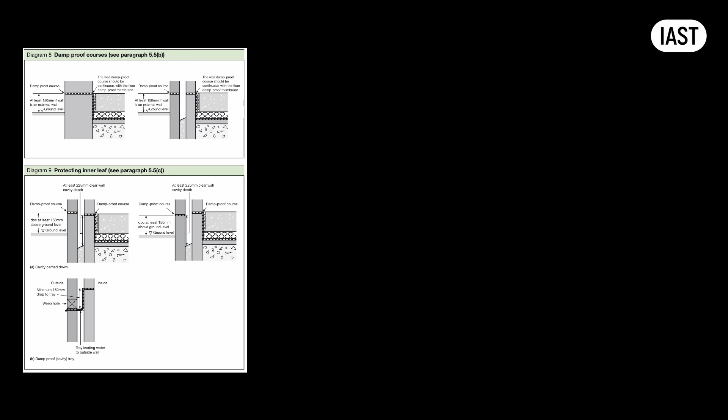That brings us to today's mission: how do we keep facades in that second category, the will leak, rather than the currently leaking, for as long as humanly possible? Our building regulations, part C, site preparation and resistance to contaminants and moisture, has some pretty clear expectations. It says walls shouldn't leak, shouldn't promote condensation, and definitely shouldn't turn into mold farms. A fairly reasonable request. The regulations even give us some practical guidance on how to design external walls to keep water on the outside, where it belongs.

Let's dive into these considerations using real examples from our Facade Intelligence platform case studies, because nothing beats learning from actual buildings. Now here is where things get interesting.

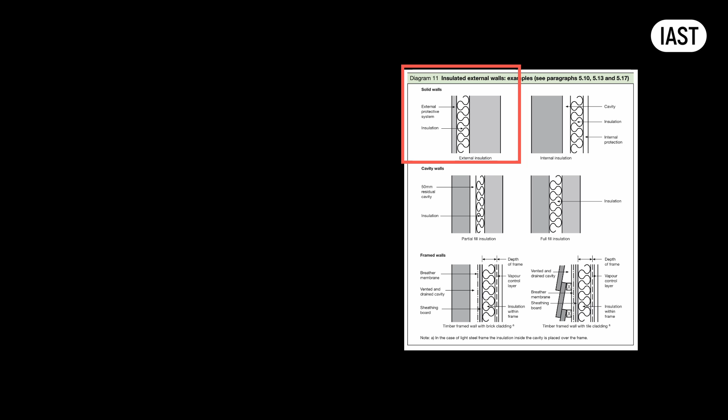Building regulations appear to give designers a free pass to use external insulated render systems without cavities. No mandate for a water-resistive barrier membrane either. So technically, you can slap insulation directly onto masonry or concrete wall, throw some render over the top, and call it a day. No cavity, no render membrane, nothing. This is what Professor Straube would call a perfect barrier wall. Basically, you're betting the farm on that thin layer of external render being absolutely watertight forever.

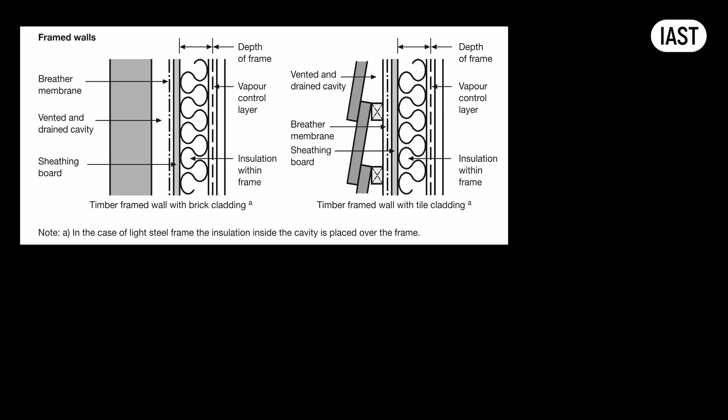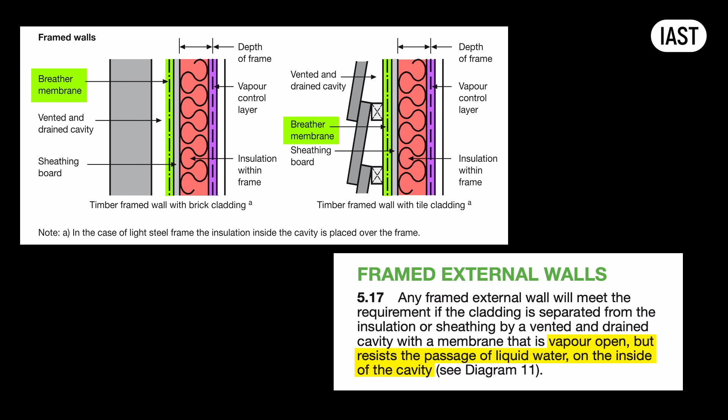Now, the regulations do mention water-resistive barriers, but only when talking about stud walls. Here they call it a breather membrane, saying it has to be vapor open but should resist the passage of liquid water, and it has to be installed on the inside of the cavity. The diagram even shows a vapor control layer on the inside of the stud wall, though interestingly they don't actually specify that it needs to be vapor closed. These two diagrams do not show the insulation within the cavity between the breather membrane and the cladding, but there's a little asterisk at the bottom that's easy to miss.

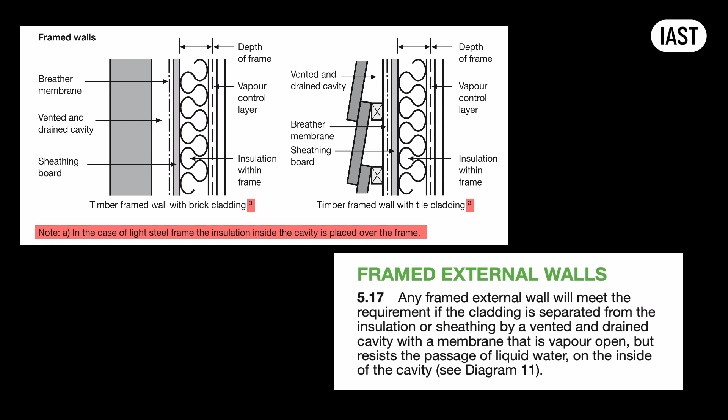For light steel frame construction, they require external insulation to be placed over the frame within the cavity. That tiny asterisk is how we end up with the most popular facade system in the UK: the rainscreen cladding wall. You've got your thin gauge galvanized steel frame, we call it LSFS or just SFS if you want to sound cool, wrapped in sheathing board that acts as your air barrier, then covered with weather-resistant breather membrane, topped with external insulation, and finally separated from your cladding by a drained and vented cavity.

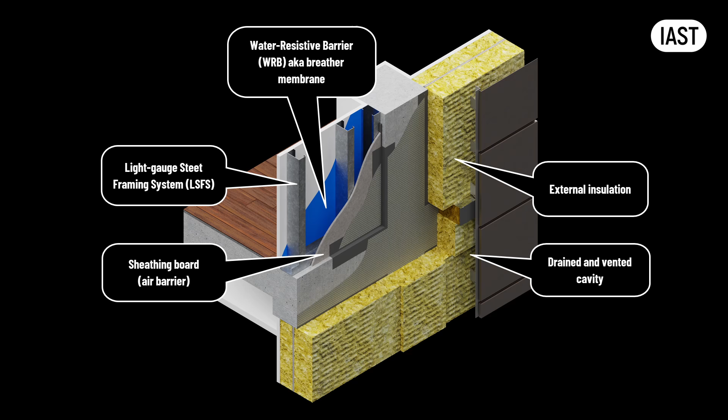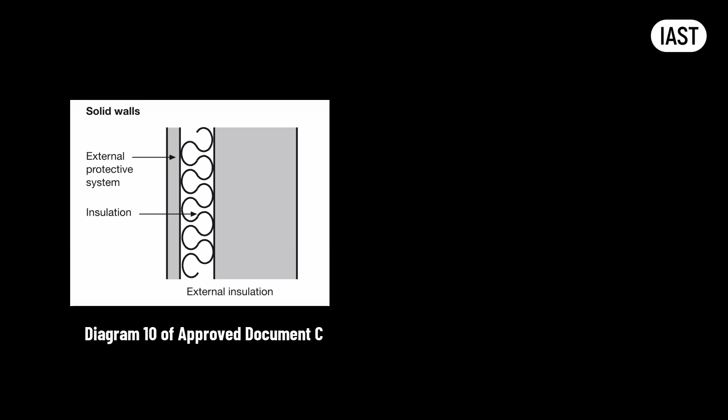Now you might think, hang on, the building regs seem to suggest I could just stick some insulated render straight onto the wall and call it done. No cavity needed. And you would be technically correct, but here's where reality clashes into regulations. The warranty providers, the people who actually pick up the bill when the building starts leaking, take a very different view. NHBC and their colleagues from LABC have seen this movie before and they didn't like how it ended.

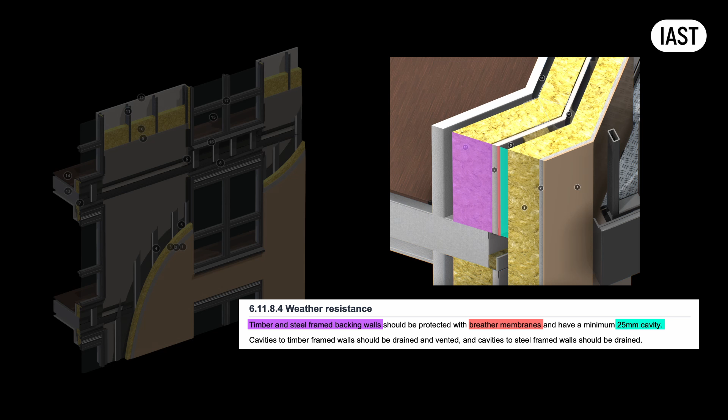So they have stepped in with some clarification. Remember Professor Straube's second D, drainage? Well, NHBC has made it mandatory. They now require external insulated render systems to have a minimum 25mm drain cavity between the insulation and the sheathing board with breather membrane, if the stud wall is used as a backing structure.

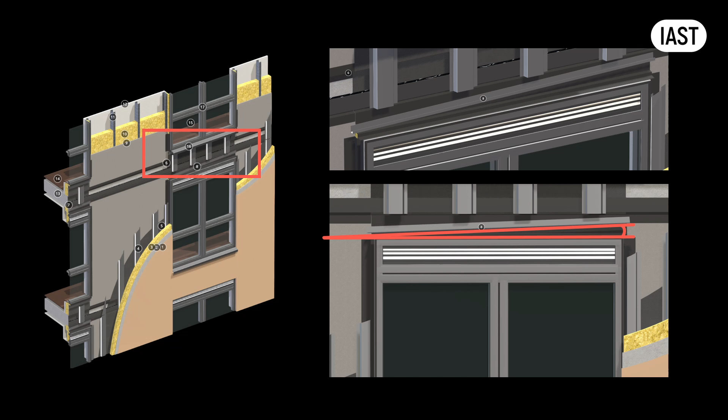But here's where things get tricky. This clever cavity solution creates its own problem. What happens when you've got a cavity sitting right above a window? It's like having a water collection system positioned exactly where you don't want water to go. As a solution, we go back to Professor Straube's first D, deflection. But this time we are doing deflection inside the wall where no one can see it. This is done by a channel above the opening, installed at an angle to the head reveal, deflecting the water away from the window, directing it down to drainage holes at the bottom of the cavity at ground level, doing exactly what a traditional drip edge would do, but hidden within the facade assembly.

So you can see now that the deflection strategy is used not only on the surface of the facade, but within the build-up, not visible from the outside at all. Another example of such invisible deflection strategy could be seen in masonry veneer walls.

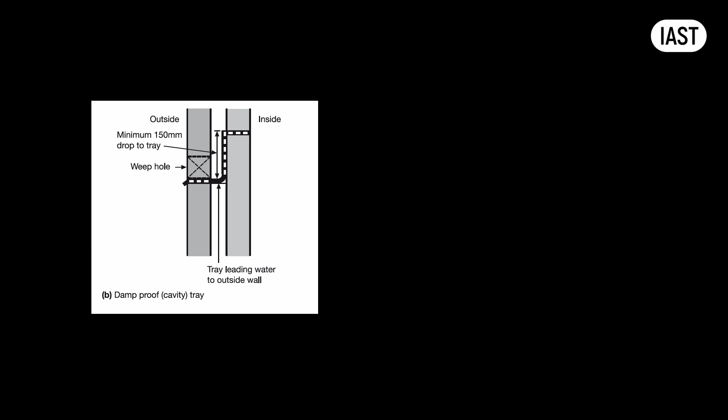Approved Document C is quite specific here. They want cavity trays with a minimum 150mm drop from the inner leaf to the outer leaf, all leading to those crucial weep holes in brick cladding. It's like building a series of invisible gutters inside.

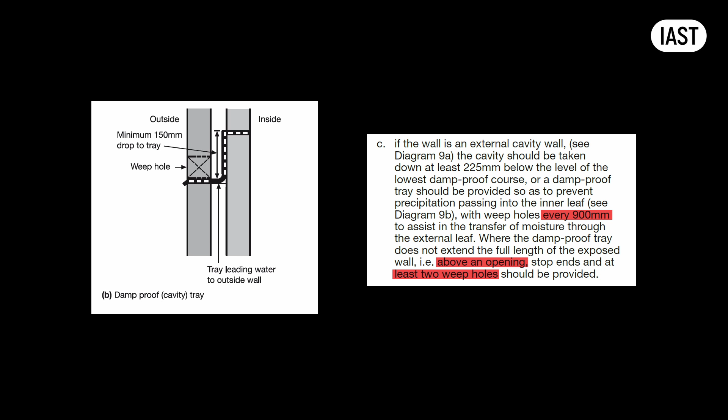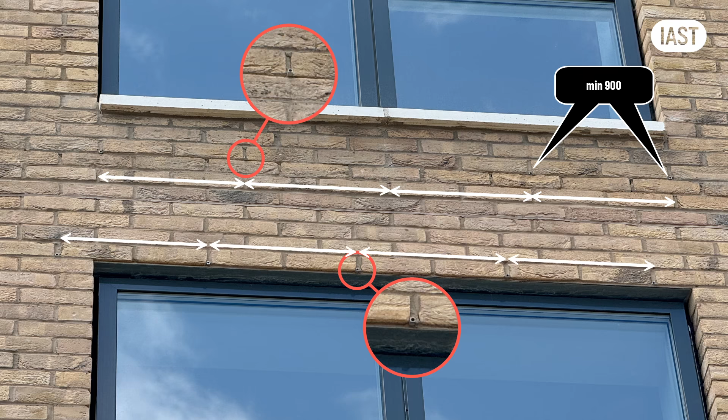The spacing requirements are quite specific. Weep holes every 900mm maximum, with minimum 2 weep holes above each window where the cavity tray doesn't continue past the lintel. Warranty providers absolutely scrutinize these details during inspections. They are checking for 1 weep hole every 3rd brick at the slab level and ensuring at least 2 per window opening.

There is a reason for their vigilance, because when weep holes aren't properly spaced or cavity trays lack sufficient fall from inner to out, problems develop quickly. The real trouble starts when mortar debris fills the gap between the cavity tray and the brick, essentially creating a dam where you need drainage. What happens next is predictable. Water ponds behind the brickwork and the brick starts its inevitable decline, turning gray and developing that horrible moss growth.

Now, this is actually an optimistic scenario. At least the water is still making its way on the outside. Once the water finds its way on the building's interior, you are facing complete facade removal and reconstruction.

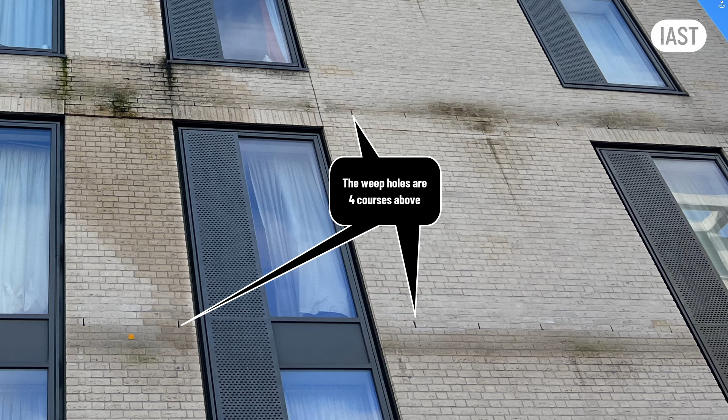Now, to be fair to this particular building, the weep holes were installed, just not quite where they should be. They are positioned 4 courses above the cavity trays, and in some locations they are missing entirely. The result is remarkably telling. The clear line of moss and mold growth creates a perfect visual map showing exactly where the cavity trays are located and where weep holes are absent.

You can literally read the facade drainage strategy just by looking at the staining patterns. The reason for the stains is that brick is a porous material and moisture can travel through it via capillary action, essentially the same force that draws water up through a sponge or towel. Water doesn't just travel horizontally through the brick, it moves vertically as well.

This creates an inevitable problem. Rainwater will always reach the first 150 millimeters of every wall through splashback from the ground. To prevent this moisture from climbing upward through the facade, Approved Document C mandates a damp-proof course, or DPC, usually in the form of a membrane positioned at least 150 millimeters above ground level. It is a simple but critical detail, one that recognizes the fundamental behavior of moisture in porous materials.

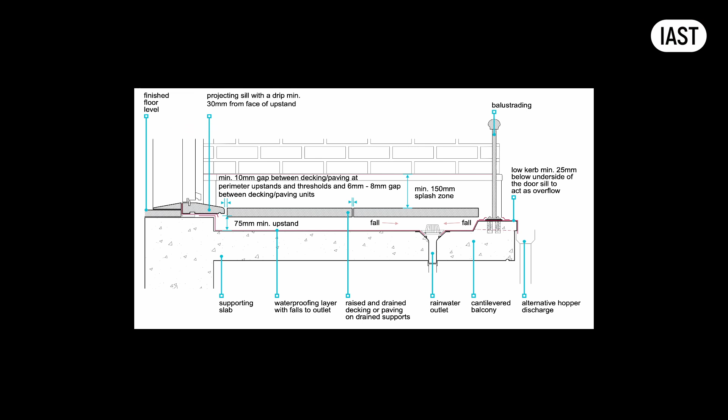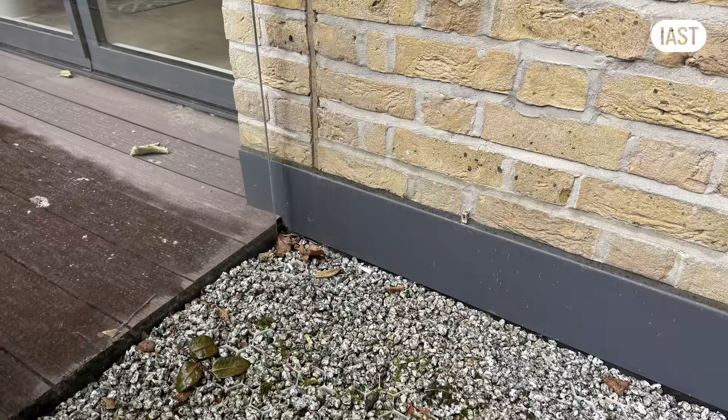Warranty provider and NHBC standards take this even further, recommending that splashback zones on terraces be executed in impermeable material entirely. The resulting detail is quite robust. In this case, it's an aluminum flashing chiseled into the first 2 courses of brick with weep holes positioned directly above. Water has very little opportunity to reach the brick surface, and therefore virtually no chance of penetrating through it. It is what we call a belt and braces approach.

Now here's the fascinating bit of construction industry history. The industry discovered the capillary effect and introduced DPC at the bottom of the brick facade in the early 19th century, quite an achievement for the time. But apparently it took another 150 years for the same industry to discover gravity.

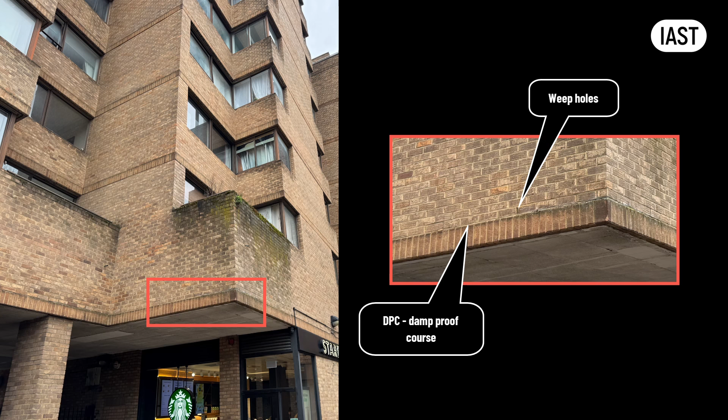Consider this London building from the 60s or 70s. It has a proper damp-proof course and weep holes at slab level, and it works perfectly, no visible stains. The designers clearly understood that water could travel upward through masonry walls via capillary action. But look at the parapet.

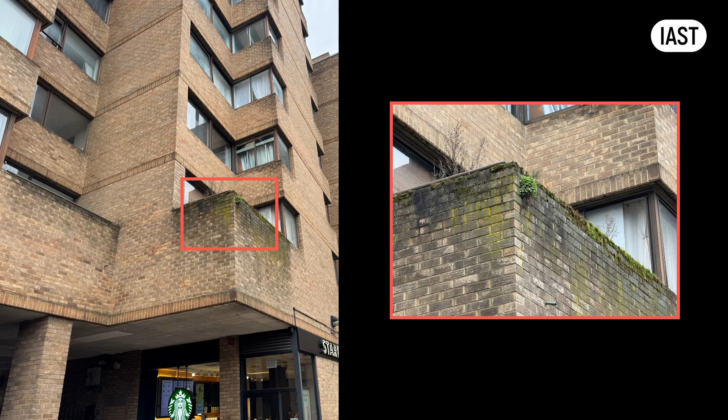The staining isn't at the bottom, it's at the top, where the brick is completely covered in moss. There is so much vegetation growing on the surface that it resembles a true green facade. The designers probably assumed that the capillary effect works only upward to negate the effect of gravity. But I was told that neither gravity nor the capillary effect work like that.

Capillary effect works downwards too. So if you are using any porous materials, brick, stone, insulated render, you need to protect the wall with a coping. That includes a proper drip detail.

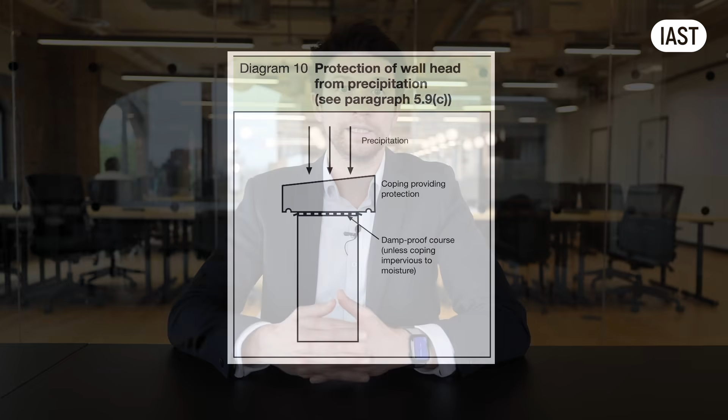Approved Document C now includes a comprehensive diagram showing exactly this. It details the provision for coping on top of the parapet with drip details at the edges, and importantly, it prescribes a damp-proof course below the coping, especially when the coping itself is made from porous material.

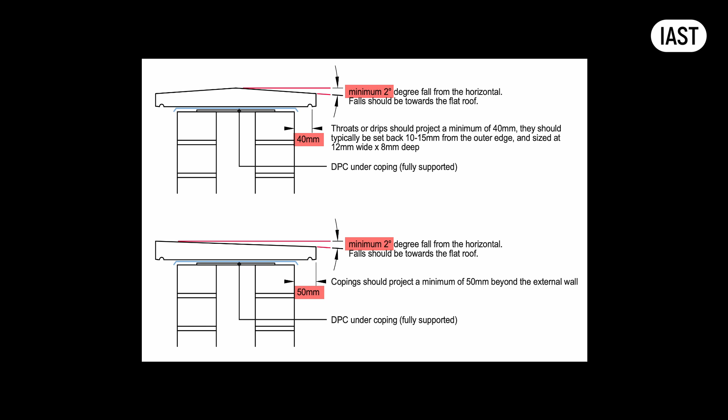Warranty providers take this guidance significantly further. LABC and NHBC specify minimum slopes and require the drip detail to project at least 40 to 50 millimeters, or 2 inches, away from the wall, depending on the coping geometry. LABC go one step beyond, prescribing specific overlap requirements for damp-proof course membrane below porous coping.

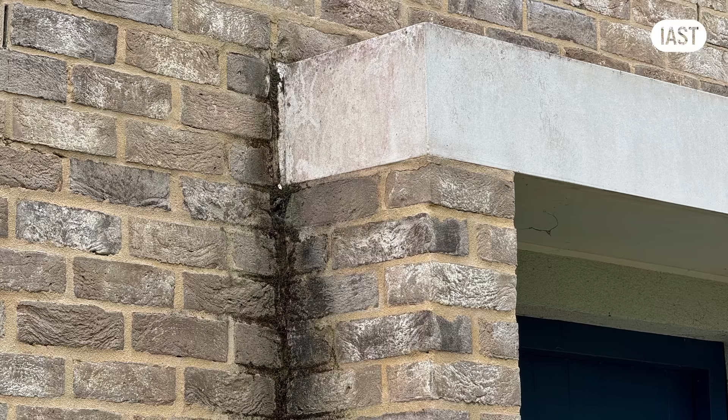Now here's what happens when you ignore this guidance. This example shows precast concrete coping with no projection whatsoever, actually sloped inwards towards the brick wall. As a result, we can see water ingress, hopefully just externally, forming where the slope meets the wall. Some facade engineers, myself included, believe that porous materials like concrete or stone simply shouldn't be used on horizontal surfaces at all, or at the very least, they require comprehensive protection.

But why might a 25mm protrusion be insufficient for brick details? Or why is zero protrusion coping completely inappropriate? The answer lies in the construction tolerances.

In situ construction is inherently imprecise, and brickwork is particularly challenging in this regard. Even the most skilled bricklayer will struggle to achieve perfectly plumb walls in all directions. This image demonstrates the problem perfectly.

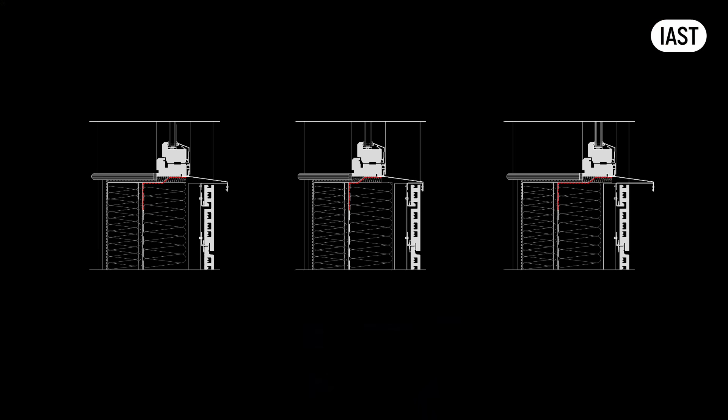The window sills below each opening are identical components, yet they appear to project different distances from the facade. This is not a manufacturing defect. It is the reality of coordinating different trades. The windows are installed by the glazing contractor and the brick by the bricklayer, and it's never installed in a perfect straight line. So as a result, we have the sills protruding to different dimensions from all brick openings, and individual sills can vary in projection from one side of the same window to the other.

This is why minimum protrusions matter. What looks adequate on paper may prove insufficient when real-world tolerances are applied.

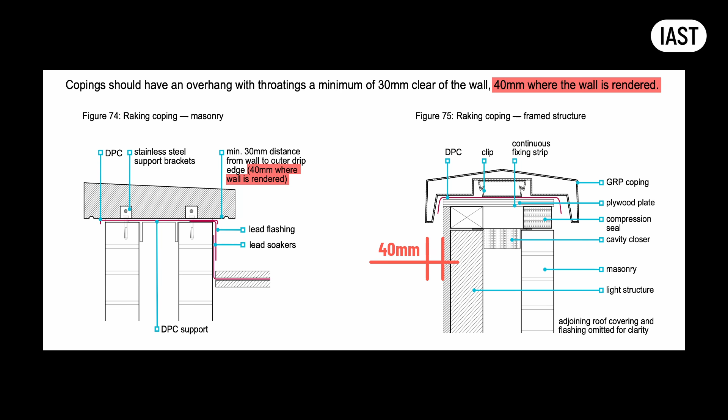These tolerance considerations apply beyond masonry facades. NHBC standards specifically prescribe drip details above insulated render systems for precisely the same reasons. Looking at this example, the importance becomes immediately apparent. Insulated render facades without proper drip details above them simply do not survive the facade warranty period in Britain. A capping with integrated drip details isn't optional, it's absolutely essential.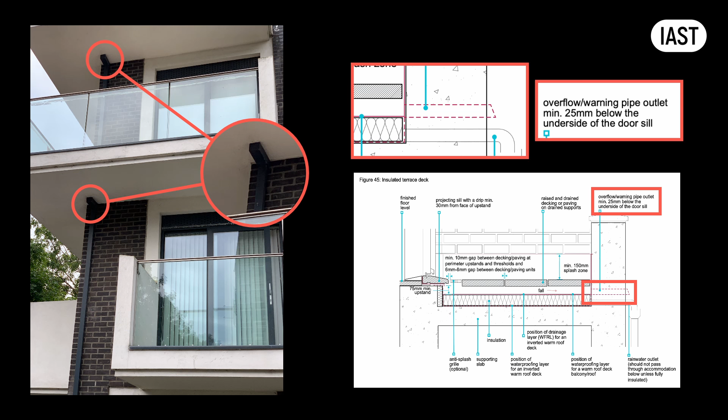For this type of balcony system, warranty providers like NHBC require overflow mechanisms as standard practice. But here is the crucial distinction. An overflow pipe serves as a warning system, indicating that the primary drainage has become blocked and water is ponding beneath the balcony decking. It signals that gutter maintenance is urgently needed. The overflow is a diagnostic tool, not a backup drainage strategy.

Unfortunately, this distinction is not widely understood, and in many buildings, the overflow mechanism ends up functioning as a primary drainage strategy for most of its operational life.

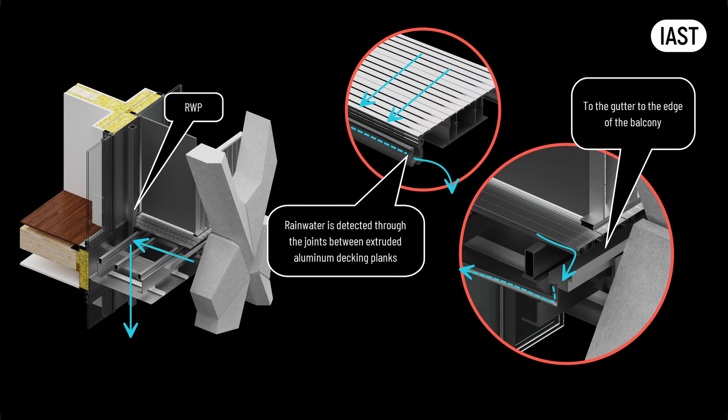My preferred approach is to direct the overflow pipe through the balcony slab onto the balcony below, as demonstrated in our interactive detail. In this case, if the drainage is compromised, the neighbors below will notify the occupants of the apartment above about the blockage, and it will be dealt with promptly, not to cause any further nuisance. Which, to be fair, is exactly what happened in this instance.

However, the notification came too late. The drainage blockage had already caused damage to the facade and the balcony balustrade below, requiring comprehensive cleaning and repainting.

If, however, overflow pipes must be directed externally through the facade or the balustrade, it is recommended to treat them as modern-day gargoyles, adopting a minimum dimension of 30 mm in accordance with LABC balcony edge clearance detail.

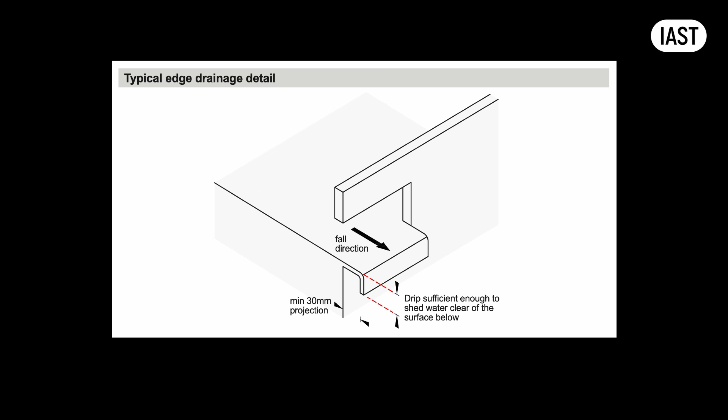This brings us to the ongoing tension in facade design. There is a constant tug of war between architects and facade engineers over water defense features. Architects tend to prefer sleek, minimalist facades without any protrusions below windows or above parapets, achieving those seamless surfaces. The current architectural culture celebrates successfully deviating from building regulations as a design achievement, a demonstration of sophisticated, good detailing.

Consider this brick facade in London. The brick reveals don't cover the window frames as building regulation guidance would typically recommend. Instead, the windows sit completely flush with the brick surface. There are no visible protruding window sills whatsoever. No movement joints, no rainwater pipes, no gutters, no damp-proof courses, and certainly no visible weep holes.

So does this mean that the building fails to comply with building regulations? Actually, no. This building only appears to be traditional masonry construction with punched window openings. In reality, it's something quite different: a precast concrete facade with curtain wall glazing.

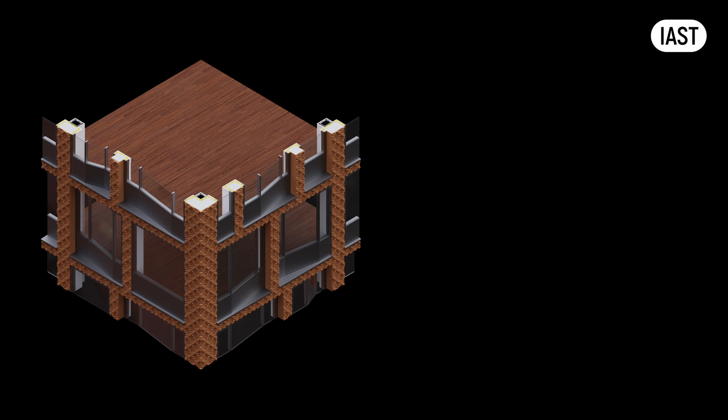The curtain wall system overlaps concrete with weather seal membrane at the back of the precast concrete columns and beams. This allows the glazing to sit flush with the surface without compromising weather performance. There's no cavity behind the brickwork, which explains the absence of cavity trays and weep holes that would normally appear every other brick. The bricks themselves are cast into the outer surface of the concrete and serve a purely decorative purpose. They are essentially architectural texture rather than functional masonry.

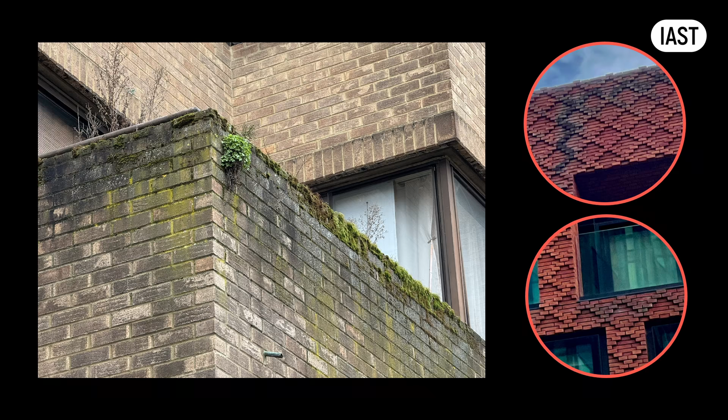Because the system isn't classified as a cavity masonry wall, designers weren't required to follow Approved Document C guidance on parapet copings and related details. But here's the thing: rainwater doesn't read building regulations. It stubbornly follows the laws of physics instead. We'll probably need another couple of decades of gravity and capillary action working their relentless magic before building regulations catch up and close this particular loophole for architects to explore.

While we are on the topic of precast concrete facades, we find ourselves in a situation where neither building regulations nor warranty providers' standards provide adequate guidance and best practice detailing in water management. With these facade types, we rely on British Standard Institution, or BSI, guidance, commonly known as British Standards.

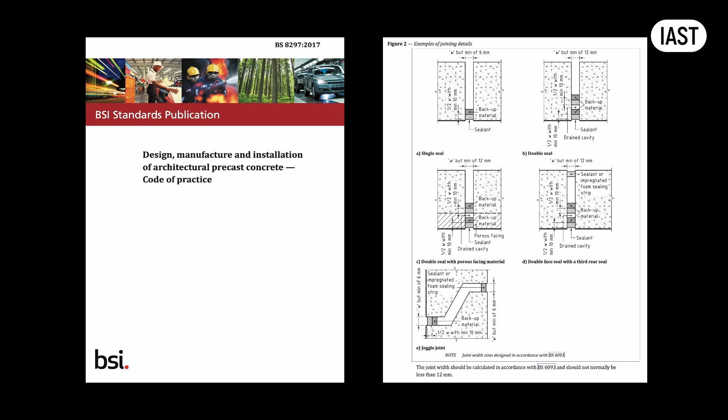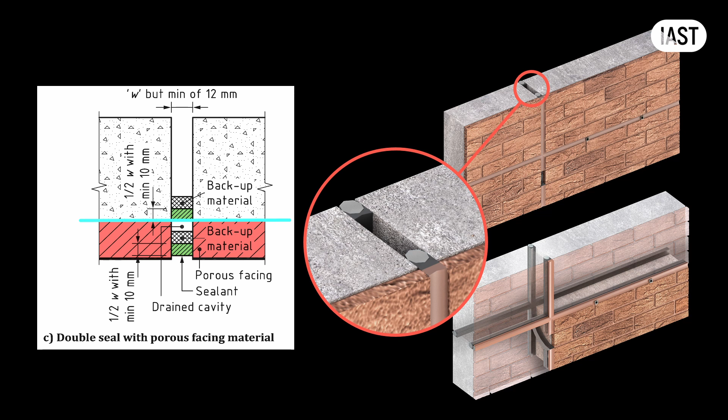British Standard guidance specifies a two-stage seal joint between precast concrete elements, with the inner seal positioned behind the line of the porous facing element, which is essentially a fancy name for brick slips. As you'll recall from Professor Straub's lecture, the chamber between these two seals requires drainage through weep holes in either vertical joints, horizontal joints, or both.

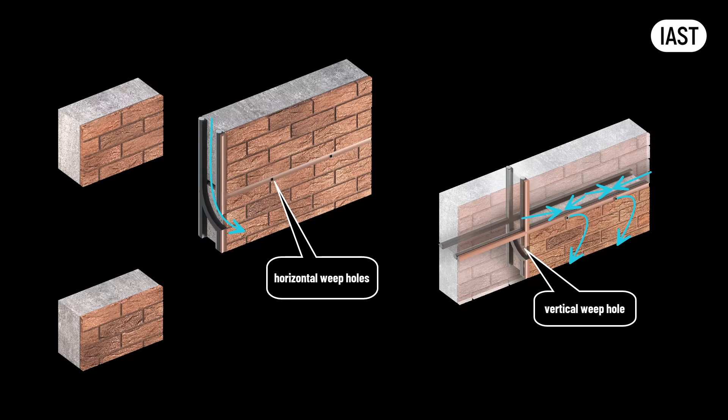For complex precast concrete assemblies, weep holes may even be required at corners where multiple panels meet. Check out our retrofitting course for more information on this detail.

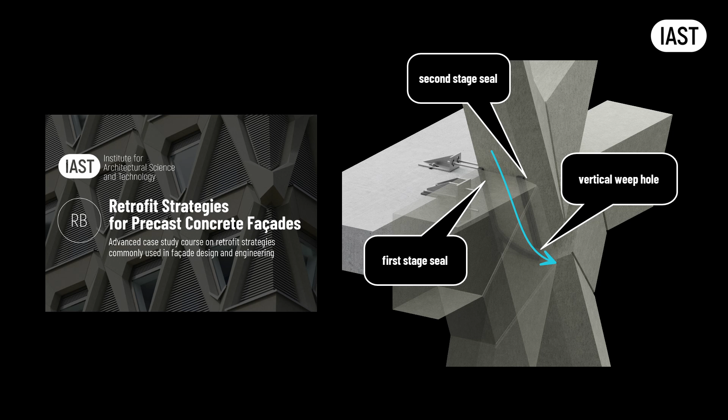Regarding curtain wall screens, building regulations don't provide detailed design strategies or specific guidance for drainage and weep hole placement. This responsibility falls to industry best practice and manufacturer systems details. We have included an interactive 3D detail with annotations explaining how various curtain wall manufacturers typically address these requirements.

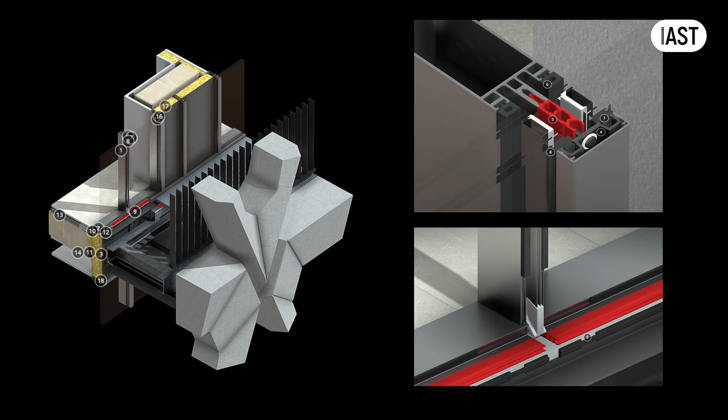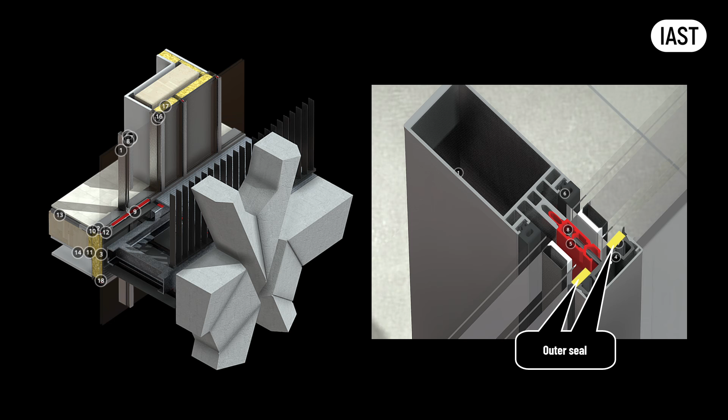This strategy closely parallels precast concrete facades. It is a two-stage seal system, but rubber gaskets replace silicone sealants. The outer seal forms between the pressure plate and the glass, while the inner seal develops between the mullion or transom and the inner face of the glazing unit. The gap between the two seals is drained through deliberate cuts in the outer seal gasket.

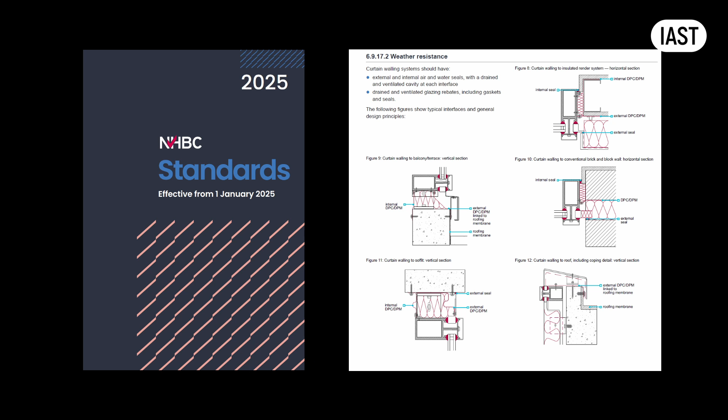NHBC standards provide excellent diagrams detailing the interface between curtain wall facades and other facade elements. These details offer crucial guidance for proper installation.

The key principle is positioning the weather seal membrane behind the inner seal gasket at the bottom, at both jamb and base details. A common installation error involves inserting the weather seal membrane between the mullion or transom and the inner face of the glazing unit. This approach is both cheaper and easier to install, which explains its frequent occurrence.

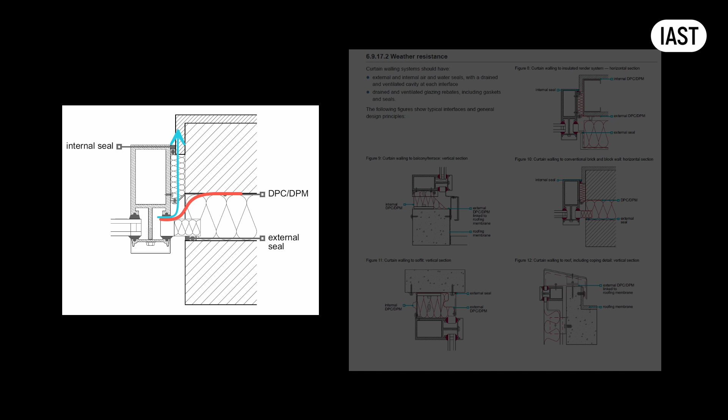However, this shortcut creates significant risk. Water can migrate from the drained gap to behind the weather seal interface, potentially entering the building interior.

The head detail requires different treatment. NHBC guidance recommends attaching the membrane in front of the outer seal, ensuring water cannot penetrate the drained gap between the curtain wall's two seals.

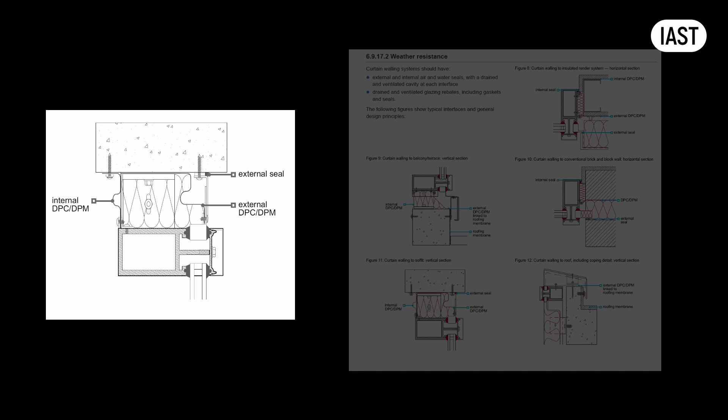Also notice the membrane loop detail where the curtain wall connects to the slab via slotted connections. This accommodates slab deflection movement while maintaining seal integrity as the building responds to loads.

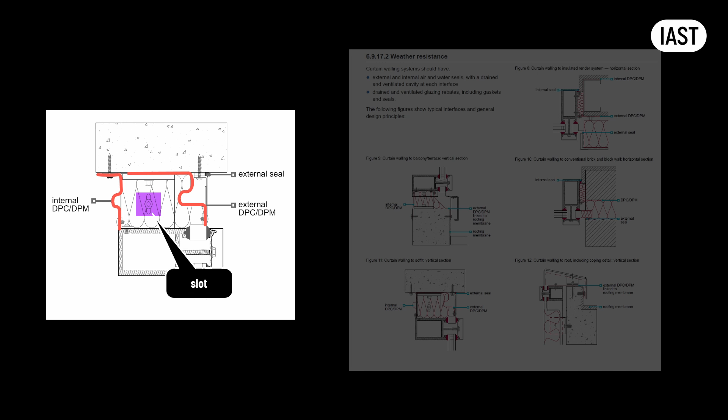This highlights an important point covered in our dedicated course on movement tolerances in facades. The most common defect from building movement isn't structural failure; it is air and water leakage through compromised seals. Seal performance must be considered during movement tolerance analysis for any project, and the movement tolerance analysis should be prepared by the facade engineer, not only by the project structural engineer.

Now let's talk about the cavities in various types of facades. Professor Straube has conducted extensive research into cavity sizing for effective drainage performance. His findings demonstrate that gaps as small as 6 to 15 millimeters can drain water effectively. The only reason we design larger cavities is to accommodate fabrication and installation tolerances, ensuring we achieve that minimum effective gap even when workmanship standards vary.

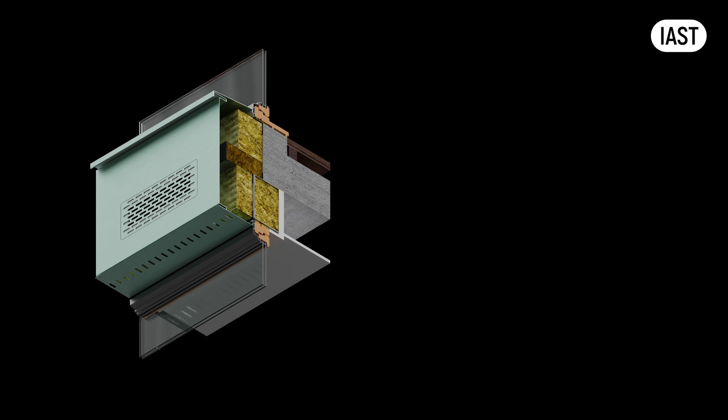This principle applies to drainage slot design in base details and head reveal flashings. Perforations as small as 6 millimeters by 25 millimeters can provide sufficient drainage while remaining small enough to prevent vermin infestation. However, Approved Document C and British warranty provider standards specify significantly larger cavities based on project location and exposure conditions.

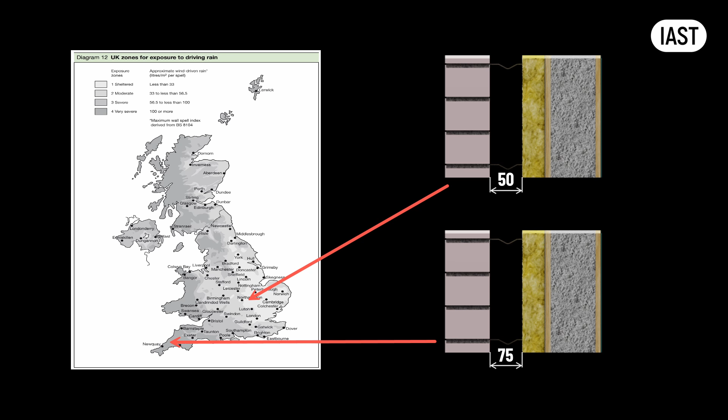NHBC standards require cavities in masonry veneer facades up to 75 mm wide in very severe wind-driven rain exposure locations. NHBC standards also differentiate cavity requirements based on the cladding joint types. Cladding with open joints requires a minimum 50 mm cavity, while baffle, labyrinth, or rebated joint cladding can accommodate slightly smaller 38 mm cavities. A very random dimension, nobody knows where it came from, and I will not pretend to know the logic behind this rule.

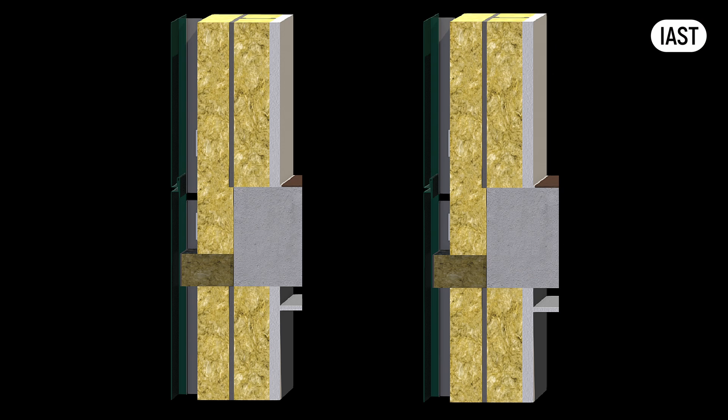In his lecture, Professor Straube correctly pointed out that cavities also present fire risks. Fire can spread within the cavities through chimney effect much more rapidly than across external surfaces. Cavities require proper compartmentalization. We have a dedicated course on the fire safety in facades that explores barrier placement and performance in detail, and it is available on Facade Intelligence.

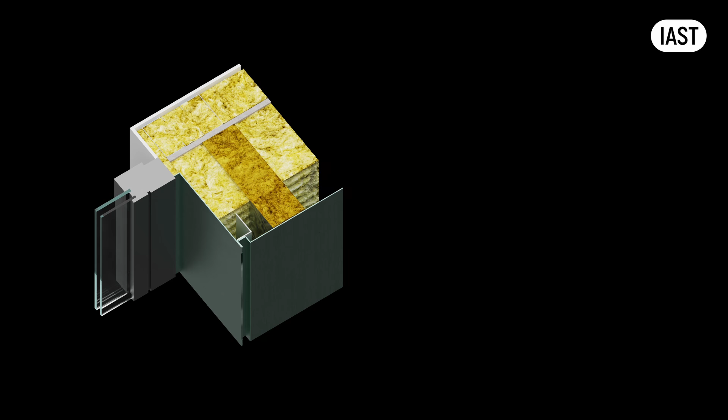But there is an important rainwater management issue with closed-state cavity barriers that's worth highlighting. Closed-state mineral wool vertical barriers work perfectly fine with impermeable materials like aluminum cladding, especially when the mineral wool sits directly against the back of the cladding panel.

With brick, however, we encounter our old friend, capillary effect again. Water travels not just vertically through brick, but laterally as well. And this is exactly why we create cavities behind brickwork in the first place. The problem arises when closed-state cavity barriers make direct contact with the back of wet brickwork.

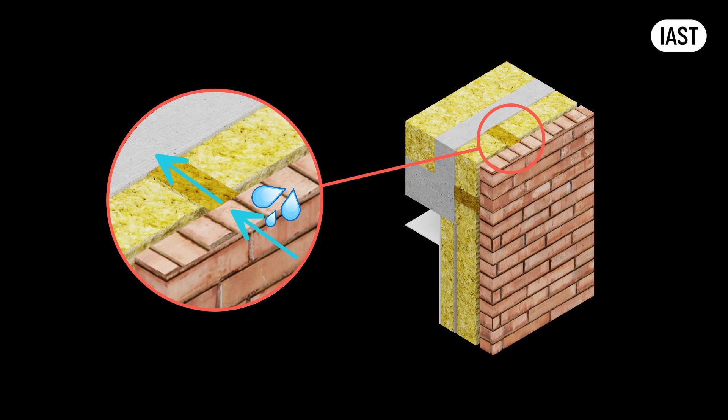Once the brick becomes saturated, water migrates through the brick onto the mineral wool surface of the cavity barrier. The barrier gets wet and transfers moisture deeper into the wall assembly. Even worse, prolonged moisture exposure can cause the barrier to deteriorate, potentially compromising its fire performance precisely when you need it most. The warranty providers are well aware of this issue.

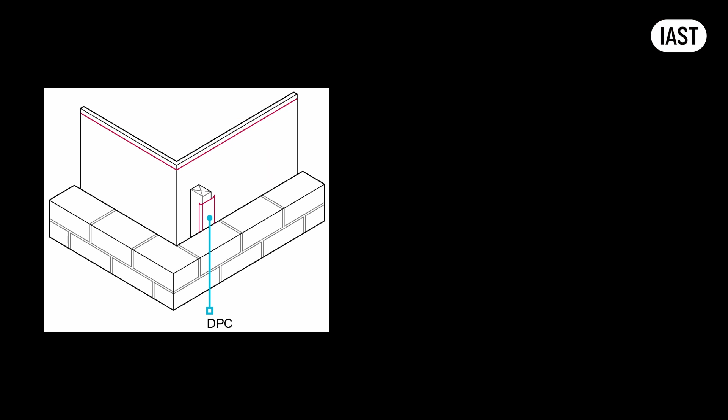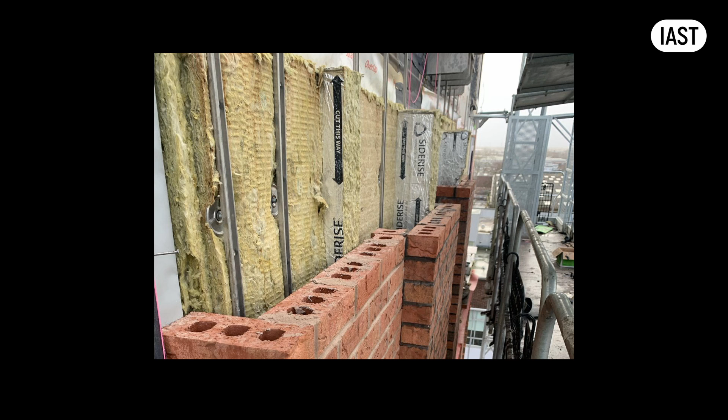Their standards specifically require the barriers to be separated from the brick by a damp-proof course membrane to prevent moisture absorption. However, I'm told this detail is frequently missed during installation. The rubber is a combustible material, and designers and installers see a rubber membrane as an inappropriate element of the fire barrier. But here is a crucial point.

Simply following the prescriptive requirements of building regulations isn't what matters most. What's truly important is understanding the reasons behind the guidance. The rationale is virtually never explained. We are told what to do, but rarely why. Understanding the logic behind best practice details is essential. This is precisely why we have included Professor Straube's lectures in this course. He explains underlying concepts rather than simply prescribing solutions, a far more valuable approach than merely reciting regulatory requirements. Mindless application of building regulations can create more problems than it solves.

So we want to recommend further reading on this topic. These two books, Moisture Control for Residential Buildings by Joseph Lstiburek, and of course, High Performance Enclosures by John Straube. I cannot recommend them enough. Also check the publications and research papers on the Building Science Corporation website.